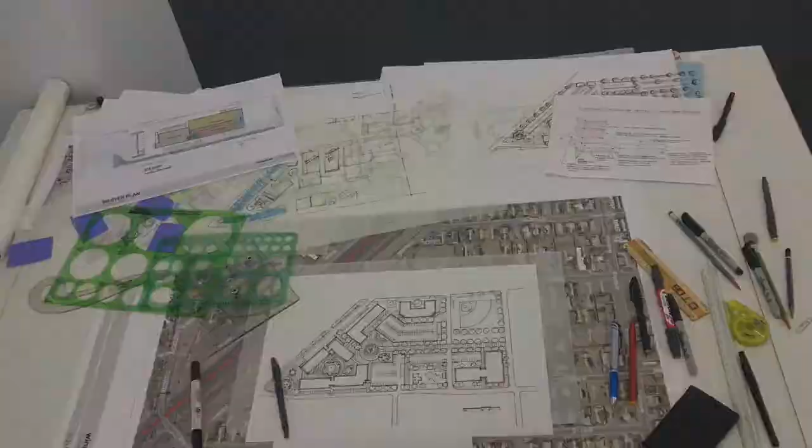Architecture is really about the built environment. We all can see buildings in the city, restaurants, apartments, etc. And if you think about it, who puts those drawings together? We work on the drawings, which are the footprint or construction of that built environment, because it's about creating new things that the client cannot imagine, but we can see it in our heads. So it's really cool to be able to dream of something and then make it happen and see how it works.

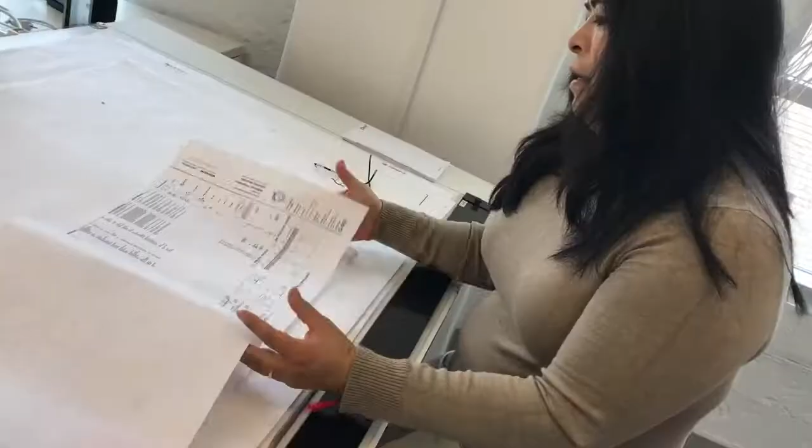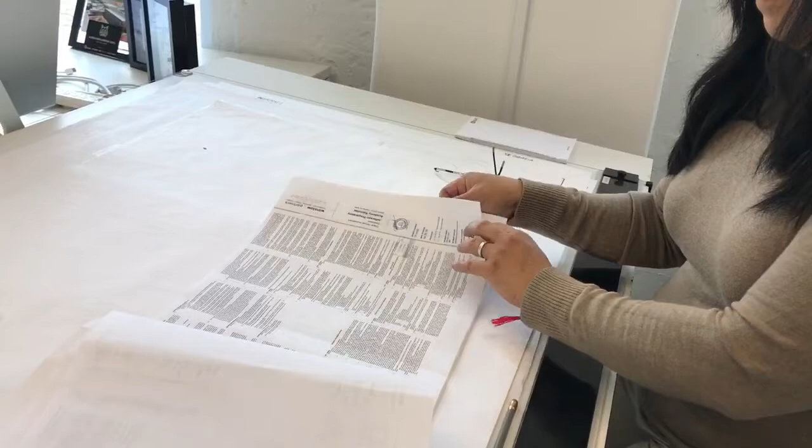In architecture, what we do most of the time is put drawings together that are the instructions of what a building is supposed to be built or what it's supposed to be like. It's a very thorough set of instructions that has to include all kinds of other disciplines: electrical engineers, mechanical engineers, structural, civil, plumbing, you name it. The idea is that all of this complies with the codes and regulations from the city, and that at the end we have a product that is habitable, that is safe for people, and that people are also going to enjoy.

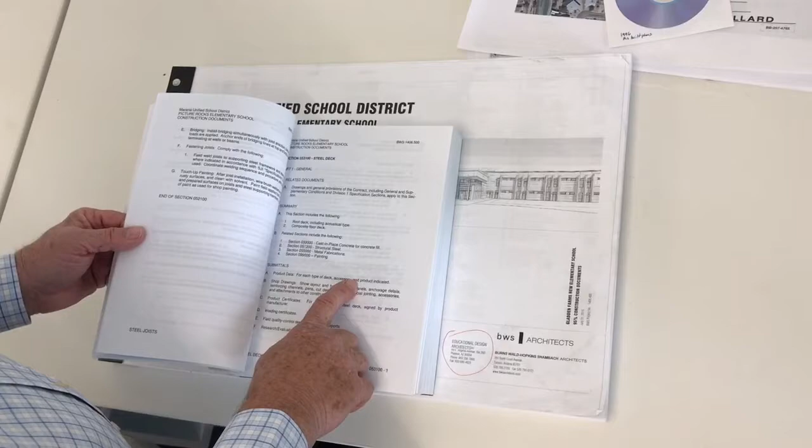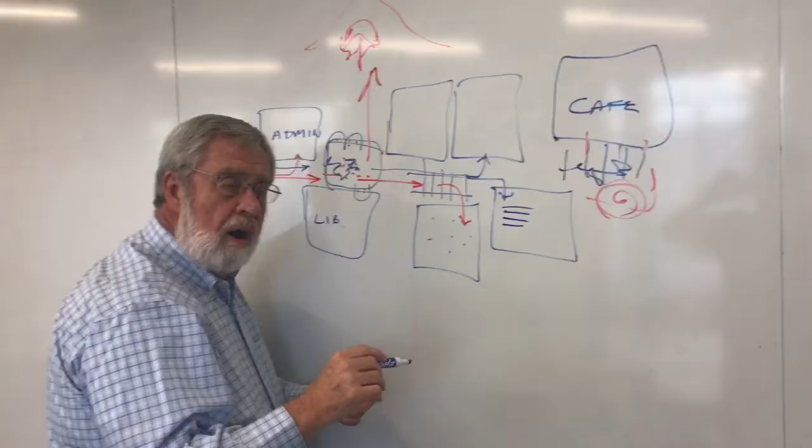Why are you an architect? I think I was actually born an architect. As I've gone through life, I've always been about people. I believe the world is about helping other people do whatever it is they choose to do and be able to do it better. In architecture, you're helping them by creating environments where whatever they are trying to accomplish, you can help them do that. And it has a whole series of sub-ramifications of how you do that and what you do to make that work. But it's really just helping mankind make the world a better place.

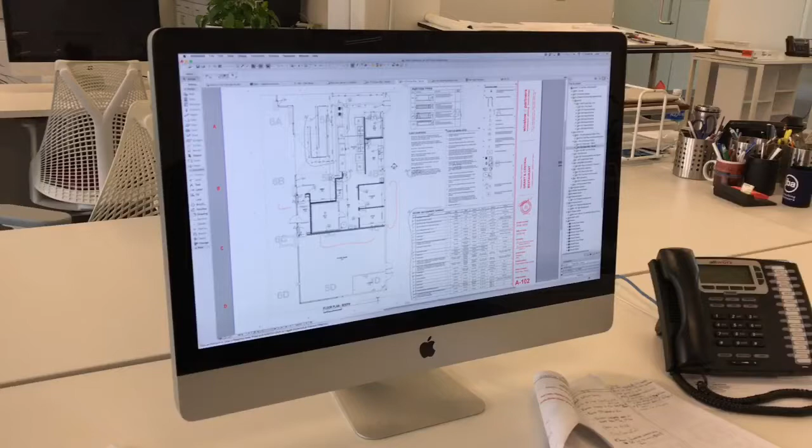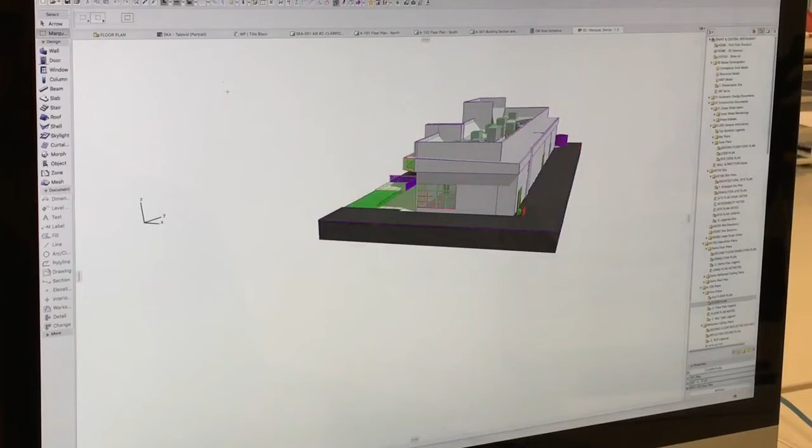Okay, so here we just have a standard floor plan, kind of something you might be used to seeing, but really this is actually linked to a three-dimensional model. We can actually start to rotate around the building. In fact, we can change how we view the model. Of course, we're underneath the building there. Let's make it even easier—sort of a different mode of viewing the 3D model where we can actually navigate around it kind of like a video game, so you can sort of fly through and enter into the building.

Here we have the front door right on into a restaurant, and there's the serving line and a bar in the background, and you've got tables and chairs. The nice thing about working in 3D like this is we can go ahead and take our clients through the model, so we can actually then adjust things in 3D.

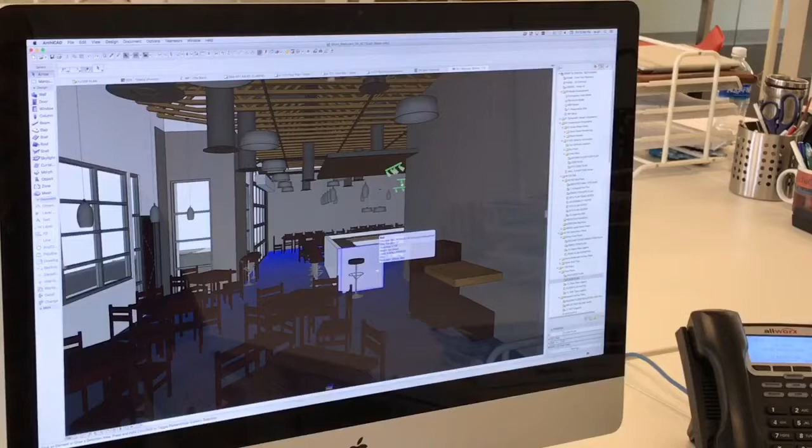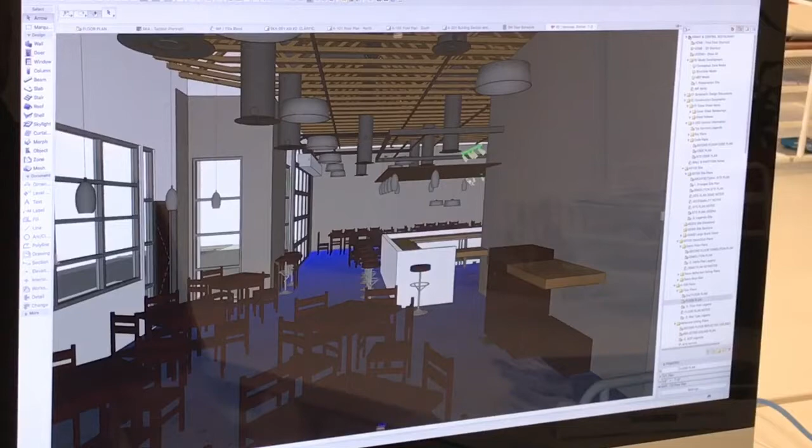So if the client tells us this ceiling is supposed to be lower, we can actually lower the ceiling. Or this counter is actually supposed to be higher, we can raise up the counter. We can move the furniture around in 3D. And then all of this actually impacts the drawings. Just by changing those couple of things in 3D, it changes the way the drawings turn out in elevation and in section. We can also get information from our 3D model—we can measure things in 3D. It's useful for visualizing what we've been working on, but it also allows us to change things in three dimensions, and then we can immediately see the impact. So working in 3D is very helpful.